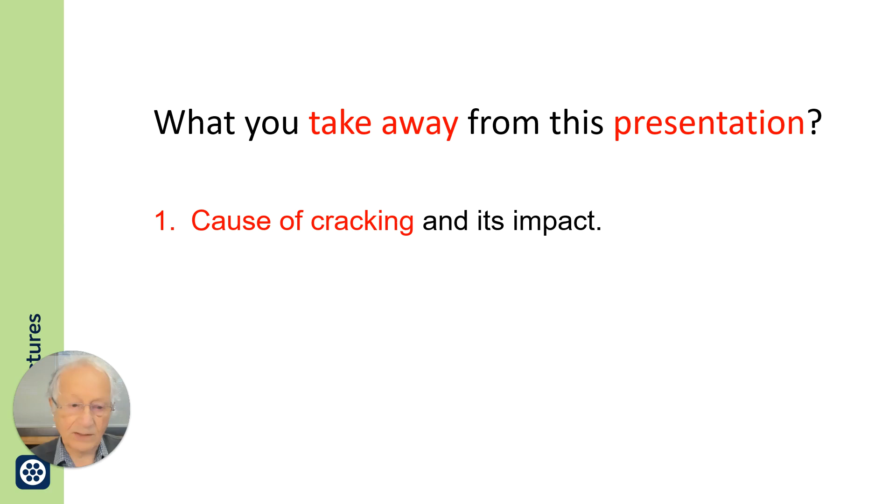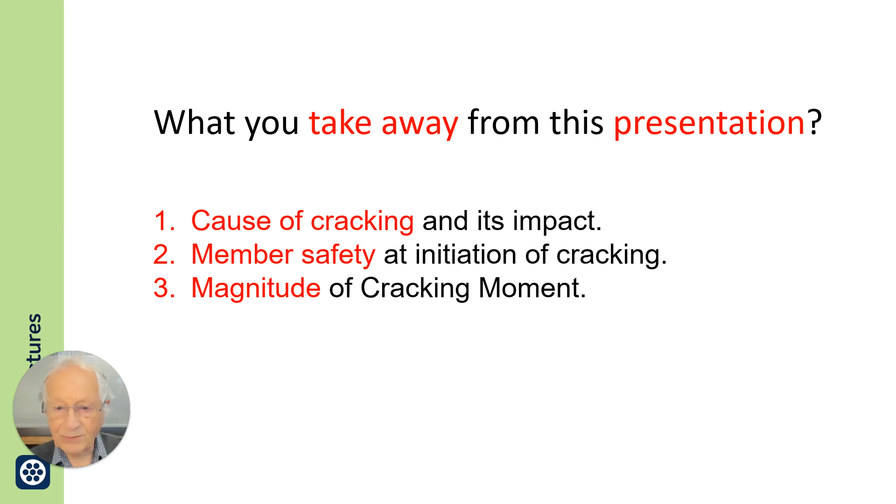Number one, what is the cause of cracking? Member safety at initiation of cracking, magnitude of the cracking moment, building code requirements for cracking moments, and a design example.

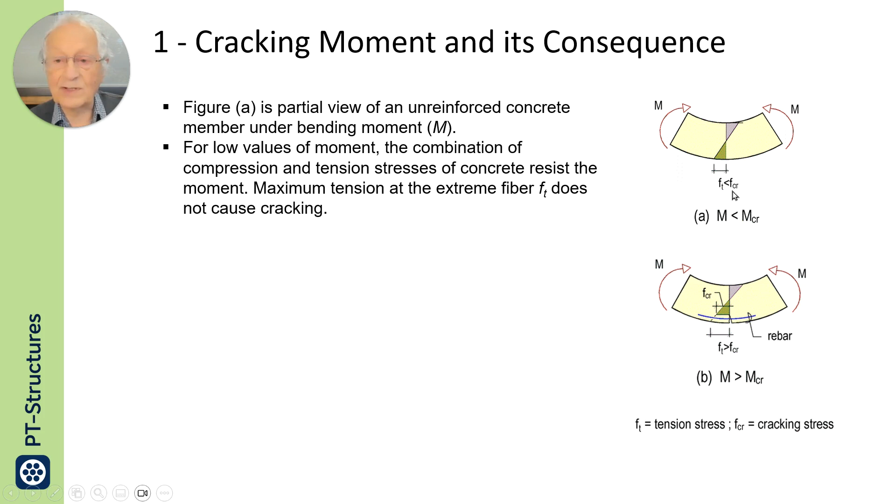For low values of moment, the combination of compression and tension stresses of concrete shown in the figure at the top lead to a tension stress which is less than cracking, and the member will not crack.

Now, increase in moment results in extreme fiber tensions that reach cracking stress, and cracking initiates. Once cracking initiates, the loss of tension which was provided by the uncracked section results in a drop in bending moment and reduction in the capacity.

Added reinforcement across the crack provides the lost moment capacity to resist the applied moment.

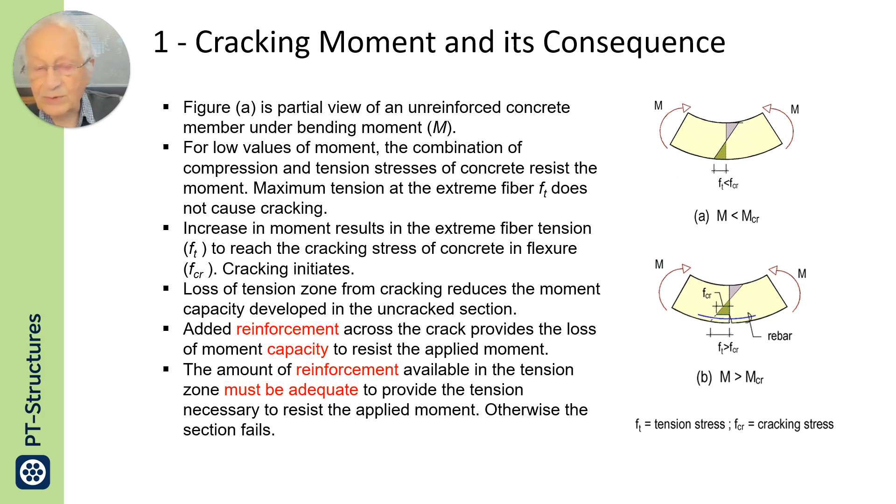So the bottom line is the amount of reinforcement available in the tension zone must be adequate to provide the tension necessary to resist collapse of the member. So in summary: what is causing cracking, what to do next, and also how the code is handling this.

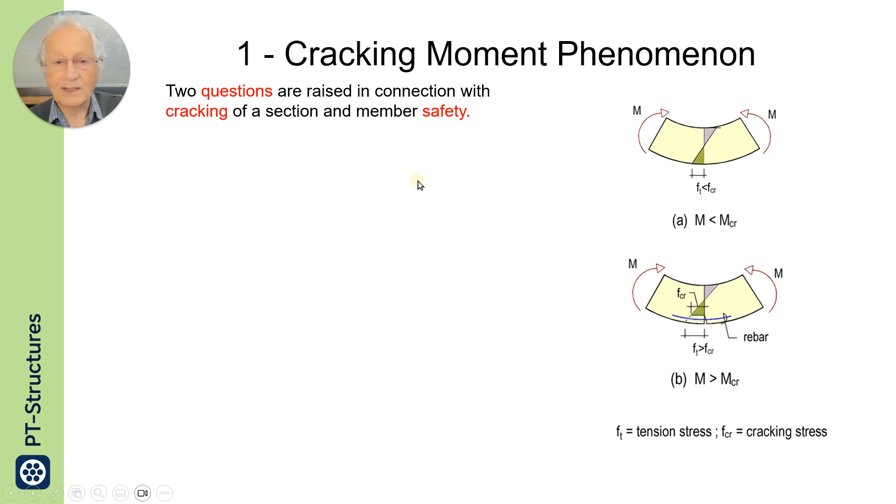The questions are: cracking of the section and safety of the member, at what value crack initiates and how much reinforcement you need, and also how the building codes handle this question. In addition, what is available in the literature in this respect.

This is the objective of this presentation. The primary objective is to clearly define the magnitude of the cracking moment and the required strength subsequent to cracking, and where this provision applies.

But first, let us review the following simple example to better appreciate the phenomenon. The focus is on cracking and safety.

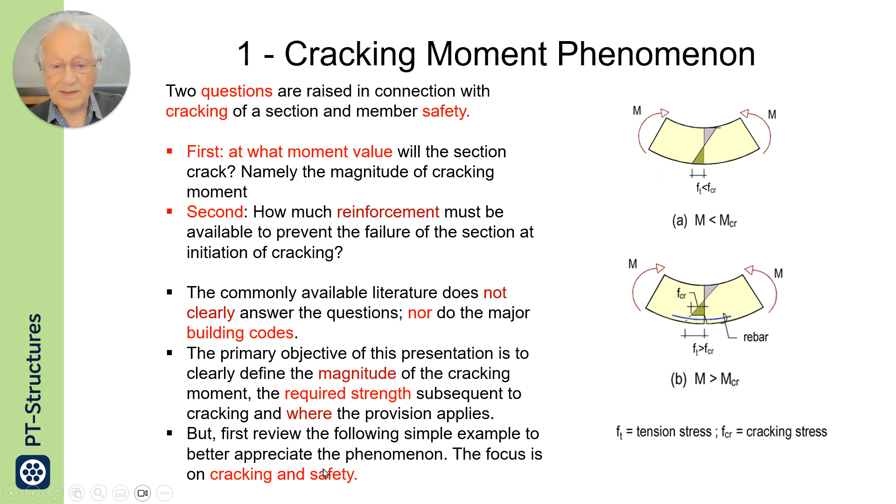I go through this simple example because I note controversy among engineers as well as in the literature, and the objective is to clarify or focus on where the controversy is and leave it to you to decide what you think is the right way to handle the situation.

Now, for safety of a member, the resistance capacity of each of its sections must exceed the force demand that causes cracking. That is obvious, but let us follow it up.

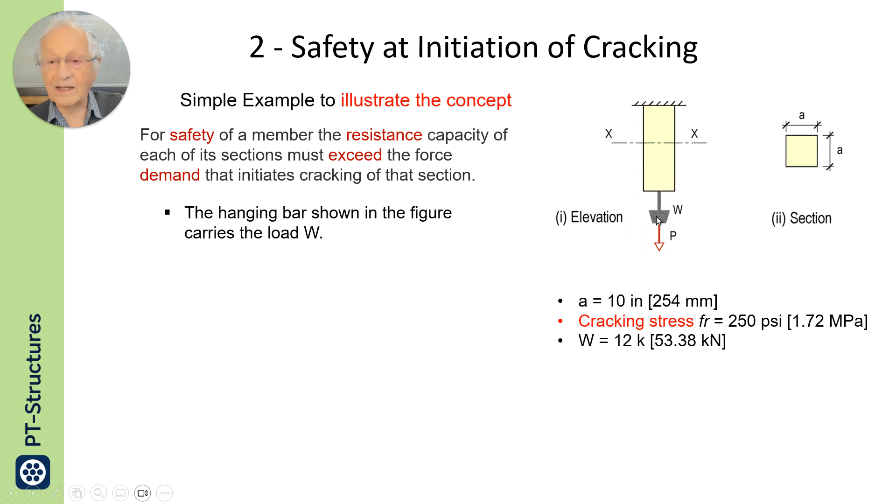In this hanging member, I have the properties, cross-sectional area. What causes cracking of this concrete? It has no reinforcement. And how much weight I have at the bottom, weight W.

The bar has no reinforcement. The two questions I raise:

At what value of P will this bar crack? This gives the cracking force.

Second question: once cracking initiates, how much reinforcement is required to be available in the section to avoid breaking of the member in two? This addresses the safety question.

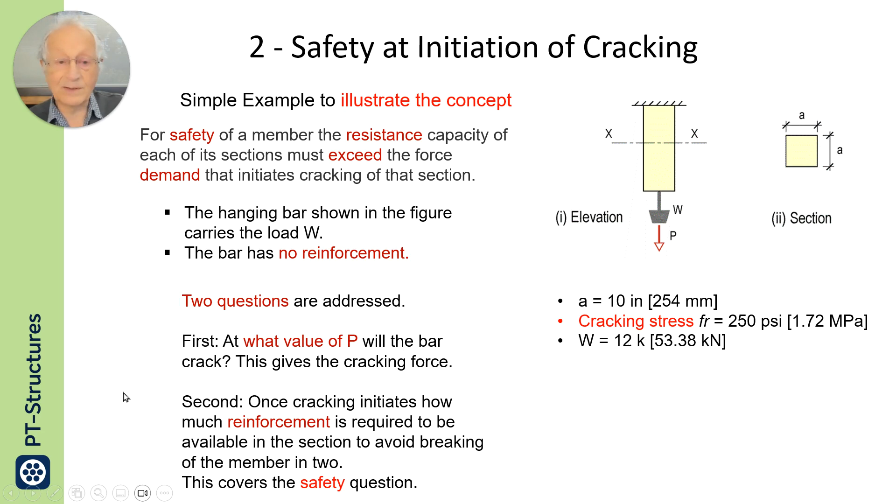Both of these questions appear to be obvious, yet we go through it because it is not treated as obviously as it appears in the literature and in the codes.

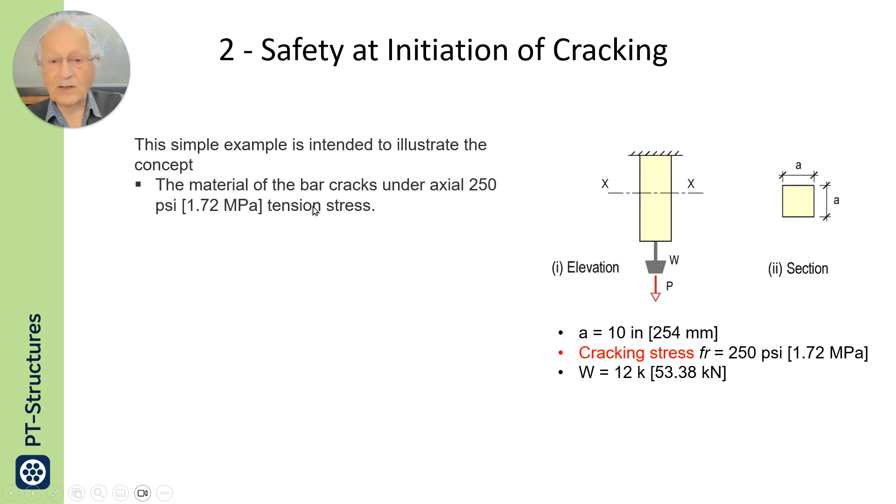Now, the material of the bar cracks at 250 psi. How much force is needed to initiate cracking? You take the cross-sectional area, 10 by 10, times the cracking stress, and that gives the force. You need 25 kips in total to initiate cracking.

Now, conclusion: the demand to cause cracking is a function of the member properties, not the magnitude of the applied force.

This is a very significant conclusion that appears very obvious. The magnitude of the force is not a function of P, not a function of the weight W. It is a function of the geometry of the cross-section and its properties.

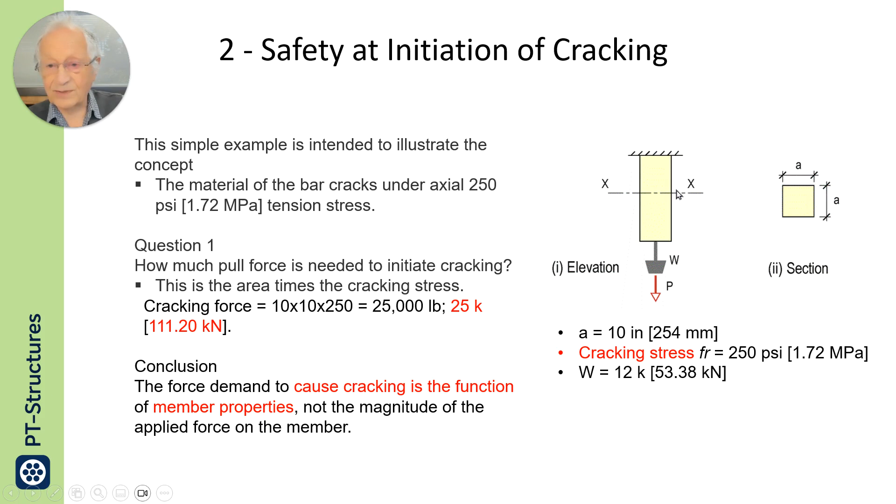Now, this is obvious, but let us move ahead and see what comes next.

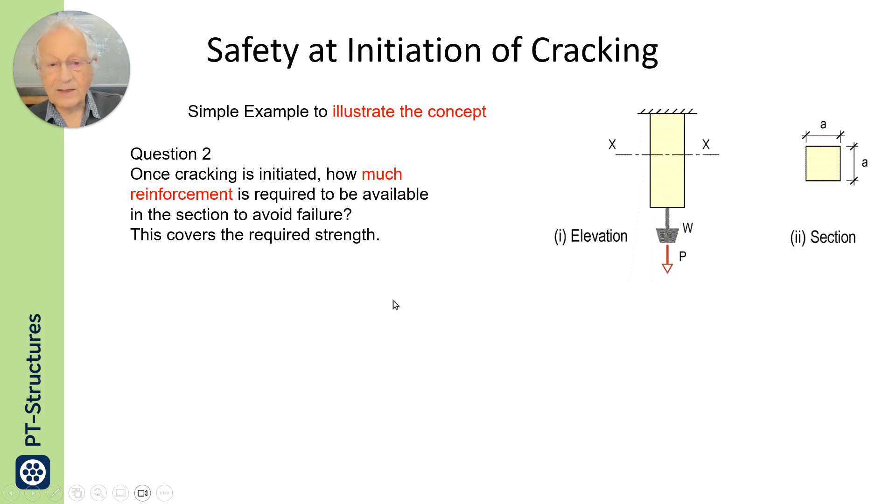Question number two: once cracking is initiated, how much reinforcement do we need to be available to avoid breaking? This covers the strength requirement.

You would say, I have the cross-sectional area, I know what the cracking strength is, I know how much demand is, this is the demand force, so the demand is 12K.

Therefore, the force W shall not be less than the strength; the strength shall not be less than the demand. Here we define a correlation between the required strength and the required demand. The required strength for safety in this example is less than the force that causes cracking.

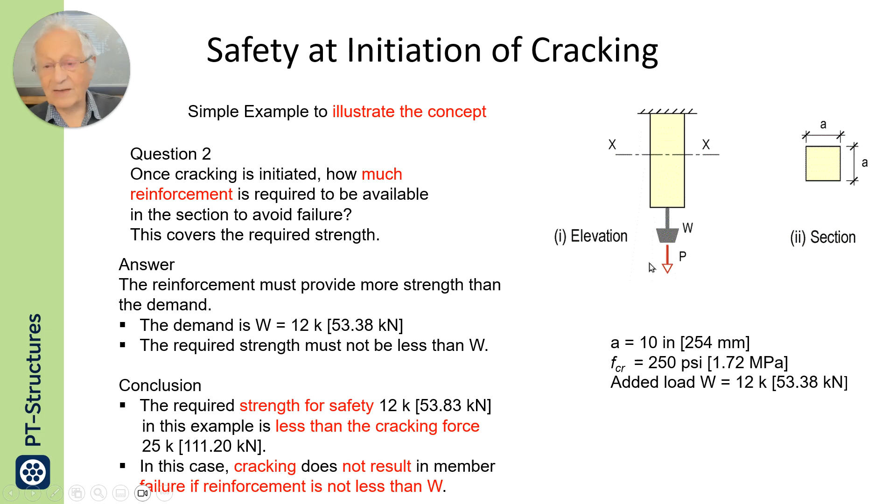Remember, in this case, the required capacity happens to be less than the cracking force. Cracking does not result in the member because we have less demand. That was a simple example.

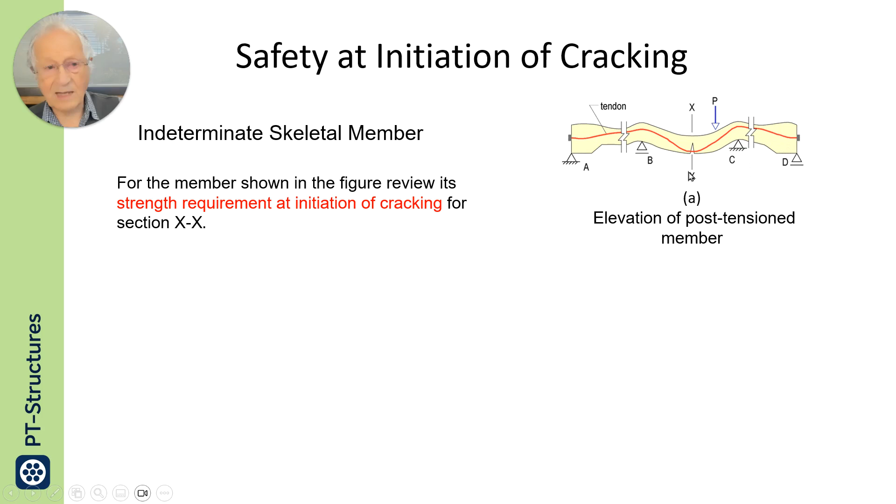Now let us look at this one, which is a member post-tensioned and continuous over a number of supports. We have a section here, XX, and we want to look at what is happening at this section. In the general case, the compression P acts at this section XX, shown outside, with post-tensioning through the section.

On the right, I show the demand: axial force, shear, and moment M. The axial force P is related to compression, but is not necessarily equal to F. Why? Because there will be reactions at the supports.

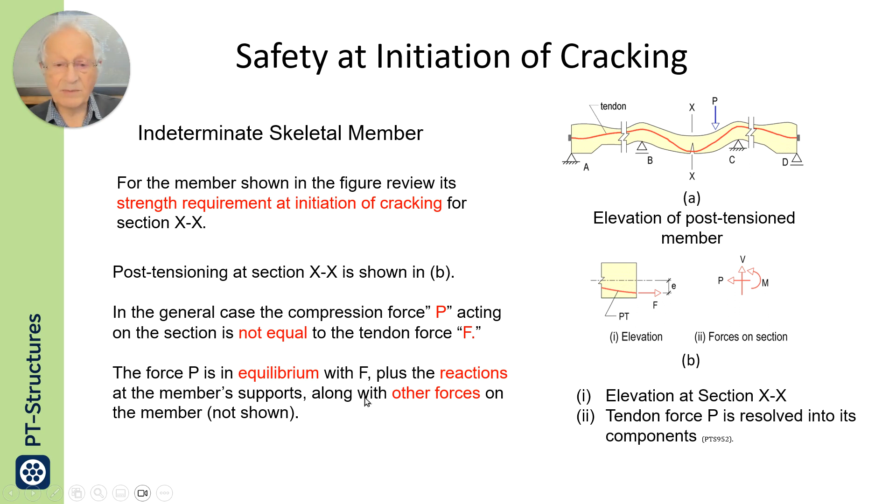In the general case, the compression P acting on the section is not equal to the tendon force F. Why? Because in the general case, you have supports, could be column, could be wall, and some of the force is taken by the walls and columns. The force P is in equilibrium with F plus reactions at the member's supports, along with other forces which could be on the member and may have a horizontal component.

Now here I have reproduced the section. P is acting here, F is the force from post-tensioning. The actions on the member in the general case are shear, axial, and moment. The axial and moment break down into these two.

This is the stress distribution, consisting of a precompression and a bending moment. The precompression, compression at center, is from the average force of post-tensioning. The geometry of the section and the resultant of the actions on this section are shown here.

The compression force P and the moment M are the two items that control the initiation of cracking, compression and moment. The distribution of direct stresses on the section are shown here and broken down into their parts.

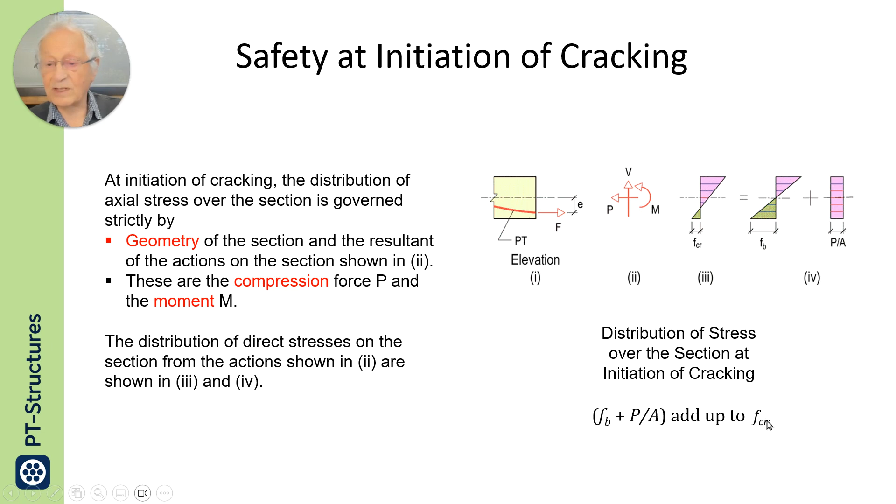So here I have a stress due to bending moment, and average precompression gives me the stress at the extreme fiber, which can cause cracking. Here is the repetition of the same.

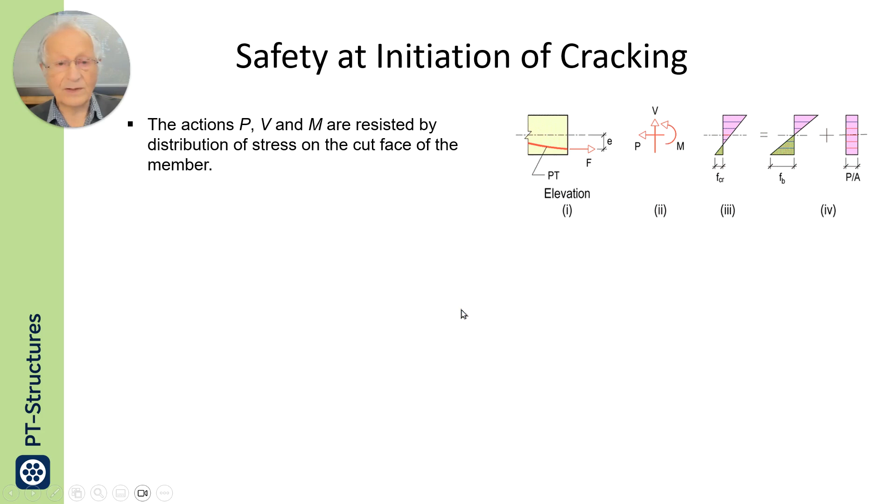The actions P, V, and M are resisted by the distribution of stresses on the cut section. These three actions are resisted by this distribution.

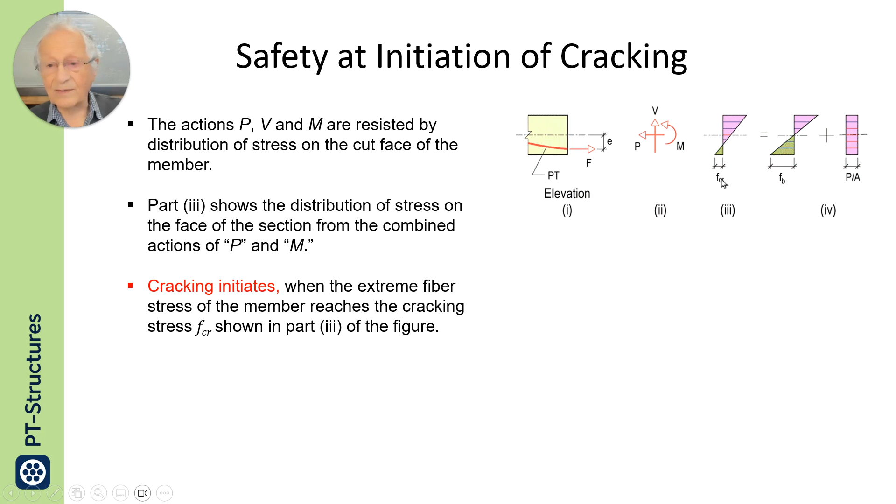Part 3 shows the distribution of stress on the face of the section from the combined actions of P and M. Cracking initiates when the extreme fiber stress of the member reaches the cracking stress FCR shown in this figure.

Note that the stress at the centroid of the section remains P over A. This remains P over A.

The distribution of stress on the section can be broken into its originating parts, which are axial force and moment, shown here. Axial force and moment result in this distribution, which will in turn lead to the cracking stress.

The extreme fiber stresses shown in part 4 add up to the cracking stress value shown in part 3. The sum of this and this add up to the cracking stress. The moment causing this condition is the moment that initiates cracking on the section, MCR, M cracking.

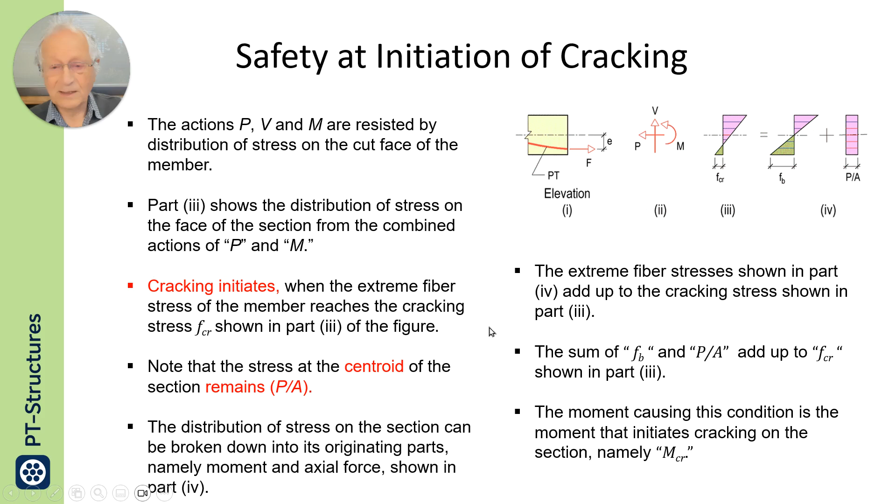Now at this stage, you may wonder why am I repeating myself, dwelling on this simple diagram? The reason is obvious. For me, it's obvious because when you go to the literature, you see a different image and get a different answer. That is the reason I'm repeating, to make sure that we are clear.

Now the cracking moment that initiates the extreme fiber tensile stress is given by the stress from moment plus the stress from axial. So this is the cracking moment.

ACI 318 recommends the following for cracking stress. ACI says the cracking initiates when the stress reaches this magnitude in bending. Now, independent of that, this relationship which I have at the bottom right can be simplified to the relationship here on the bottom left, which says cracking moment is given by this value. This is the magnitude of cracking moment.

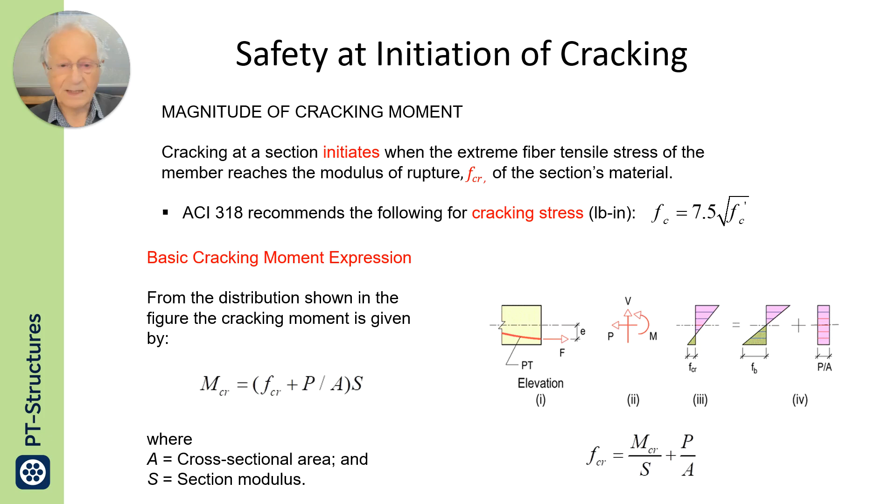A is the cross-sectional area, and S is the section modulus. I'm going to call this basic cracking moment expression to differentiate it with the alternative cracking moment. This is the basic, derived from this diagram. The alternative formula doesn't follow this diagram. Now, from the distribution shown, we get to this basic value. If you look in some of the literature, this is what you find.

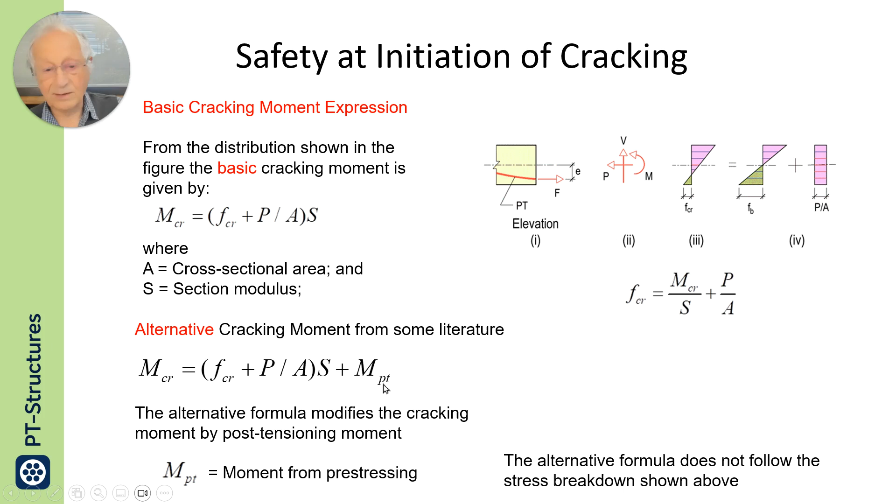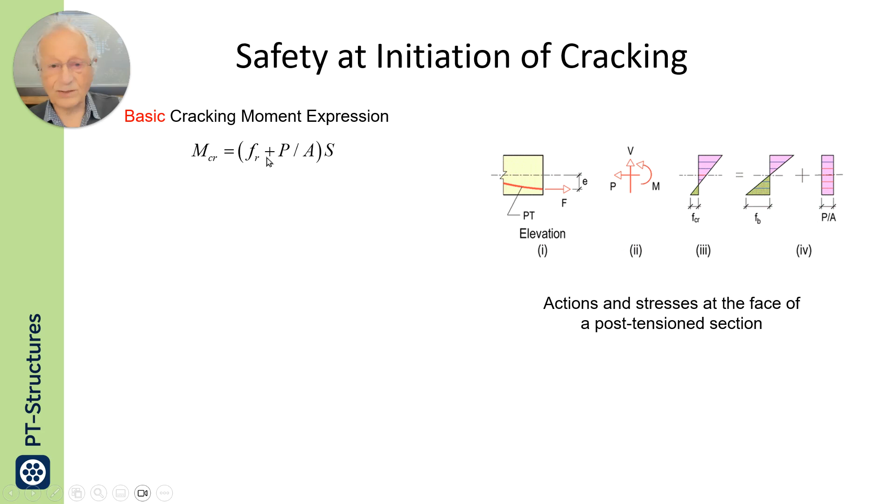That in addition to what we have at the top here, it says the cracking moment includes the contribution of MPT. MPT is the moment from post-tensioning. Why and how, I am not sure what is the argument, but certainly doesn't look right to me. I think the one above makes sense, the basic makes sense. This is the basic relationship derived from this distribution. This is the alternative that you can find in the literature.

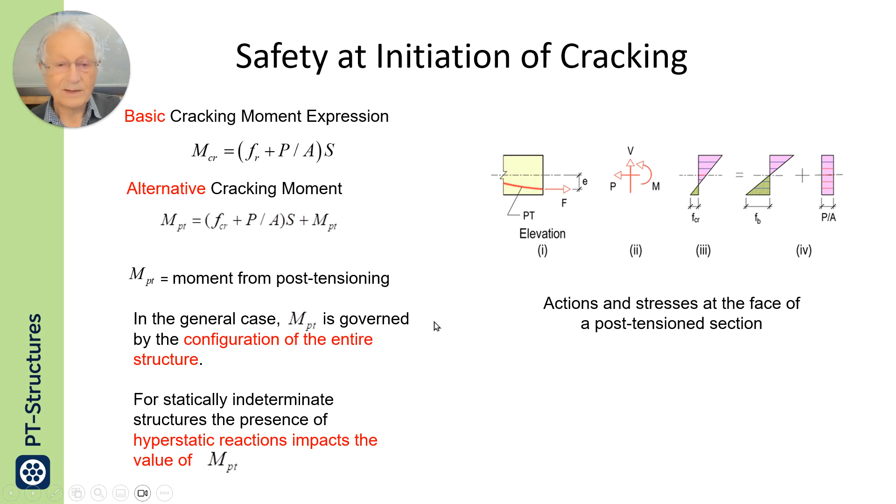For statically indeterminate structures, the presence of hyperstatic reactions impacts MPT. Now, this expression that I have here expands on this. It says MPT, if at all were to be a consideration, must include the hyperstatic reactions, which again, if you look in the literature, it doesn't include. MPT that is given here is simply the force F times E. So, as far as we are concerned, this is the right formula at the very top.

What about building codes? Building codes have this provision to avoid failure of a section at initiation of cracking. The reinforcement in the section must develop moment capacity not less than the cracking moment that initiates the crack. That looks very reasonable. The cracking moment requirement requires a safety factor, K. In other words, a section which has a capacity, as far as ACI is concerned, 1.2 times the cracking moment is considered safe.

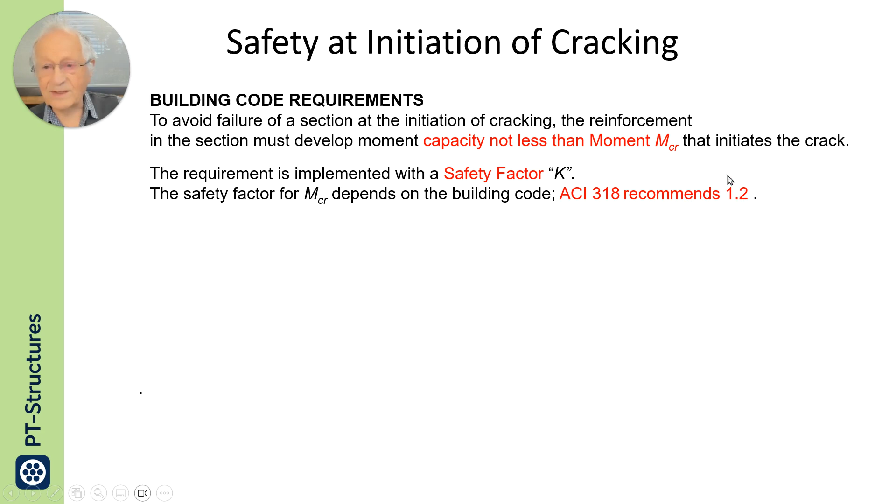Now, ACI permits you to waive this requirement. I have it somewhere down in the following slides, but the penalty is very high. Now, this is the relationship for ACI. The capacity should be 1.2 times the cracking moment, or the other provision, which I'm going to come up with in the following slides. Phi is the strength reduction factor.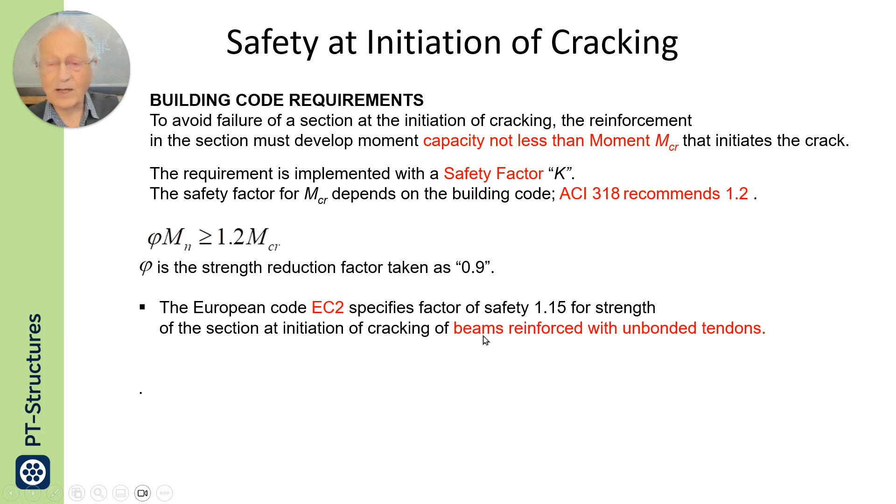EC2, the European code, has a safety factor of 1.15. The section at initiation of cracking of beams reinforced with unbonded tendons. That's very interesting. That European code states that this requirement applies to beams that are reinforced with unbonded tendons. But EC2 permits the requirement to be waived if the strength of the cracked section is not less than the force demand. That's very interesting. Very interesting. Why?

Let me repeat it. EC2 says if subsequent to cracking, the strength of the section is not less than the demand, you can waive this requirement. My response to this is, at design time for safety, a requirement is that all along the member you have safe design. You have capacity in excess of demand. In other words, before you get to the question of checking cracking, you have already satisfied the requirement of safety along the entire member. So this is really redundant. Nonetheless, it is in the code.

ACI 318, in its latest, requires the evaluation for slabs with bonded tendons. EC2 has the opposite, with unbonded, for both one-way and two-way systems, but also requires the application to beams reinforced with bonded tendons. ACI wants to penalize the application of bonded tendons. Now this is interesting. The latest ACI 318 permits this requirement to be waived, provided subsequent to cracking, the section's capacity is not less than twice the force demand. Now, that is very vague. That is in later ACIs.

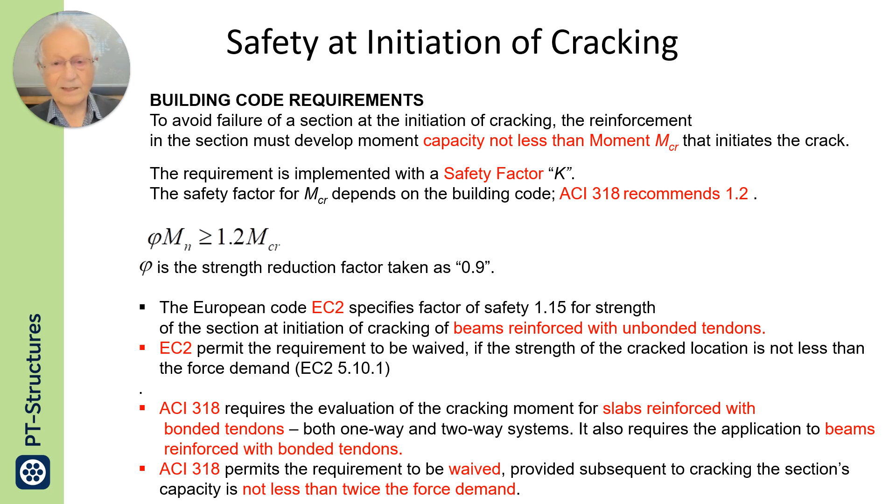You can forget about this factor of safety if at the location of crack, the capacity is twice of demand. Now, what is the demand? Is it 1.2 dead, 1.6 live, 1 hyperstatic load combination? Is that the demand? It is not very clear. Or is it dead, live, and hyperstatic? Now, that is left to the judgment of the engineer. Now, slab constructed with unbonded tendons, neither ACI nor EC2 require check for initiation of cracking.

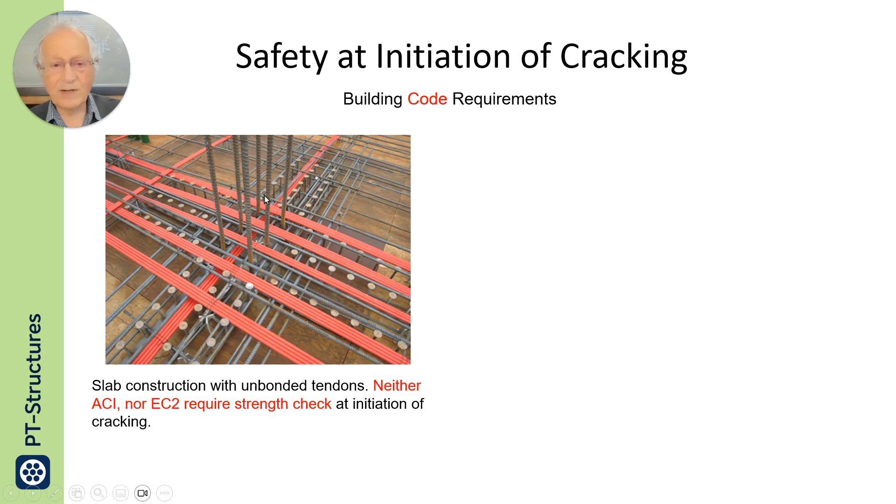In one of the following pages, I will explain why. Just pay attention here that neither of the two for this configuration require checking for cracking. Now for bonded, ACI requires checking for safety at initiation of cracking.

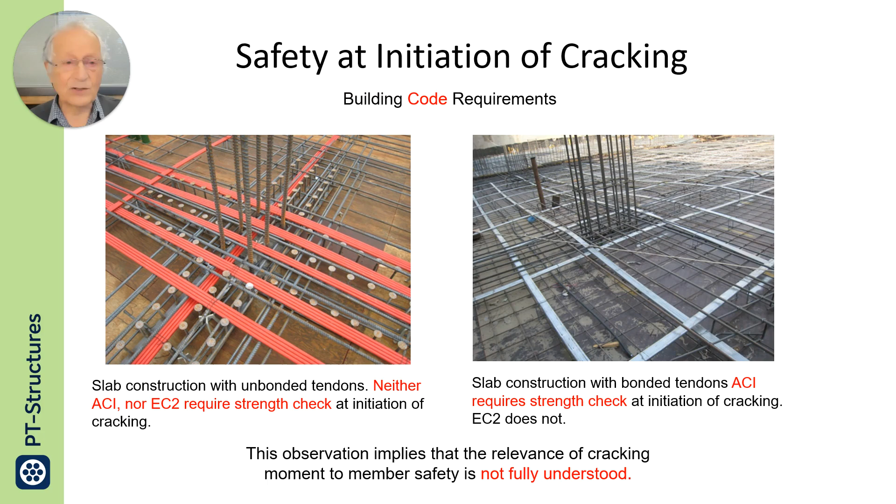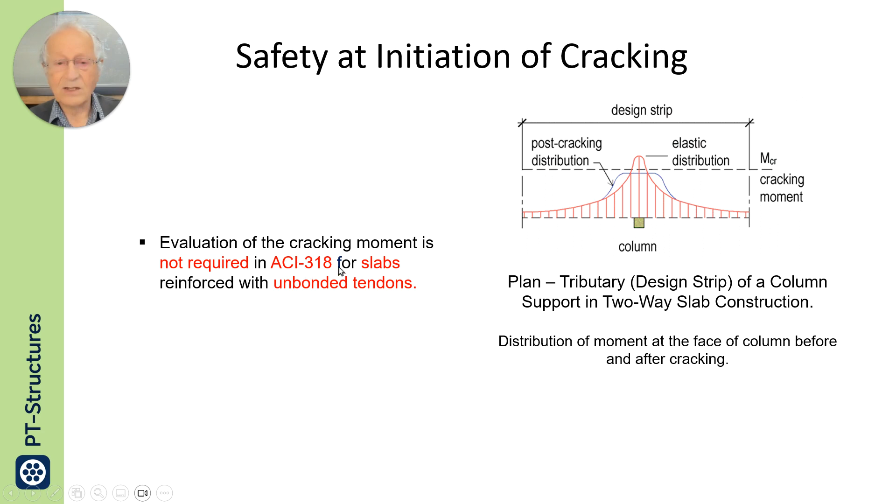So it appears that for column-supported slabs, the initiation of cracking near the column, where the maximum stress is, is not going to be very critical. So evaluation of the cracking moment is not required in ACI for slabs reinforced with unbonded tendons.

The loss, okay, this is what I explained. Local increase in strain at the crack location will be distributed over a length of slab crossing the crack. This does not apply to beams or one-way slabs where the stress is all uniform at the top. You do not have the reserve that you have here.

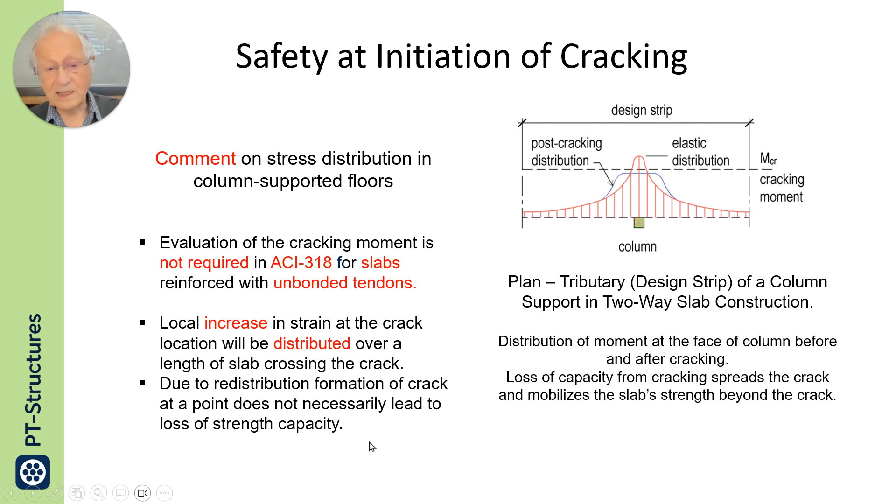Due to redistribution, formation of crack at a point does not necessarily lead to loss of strength capacity. Now let us go over a design example to see how it all applies.

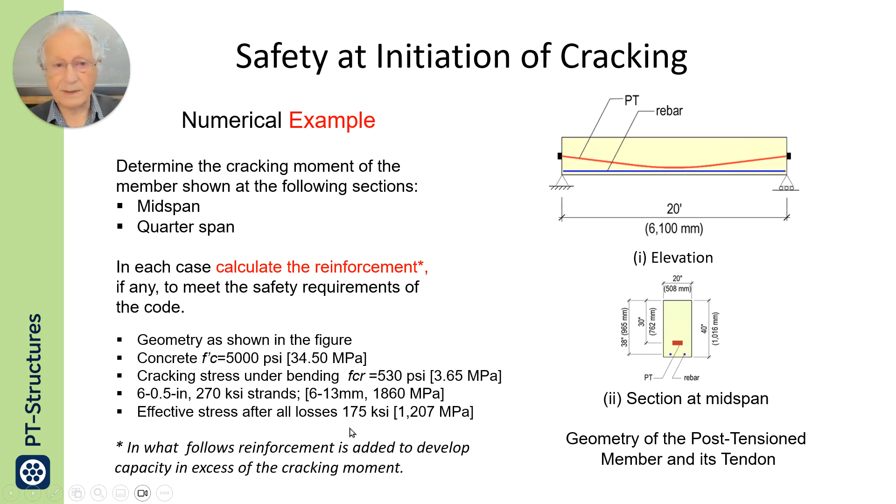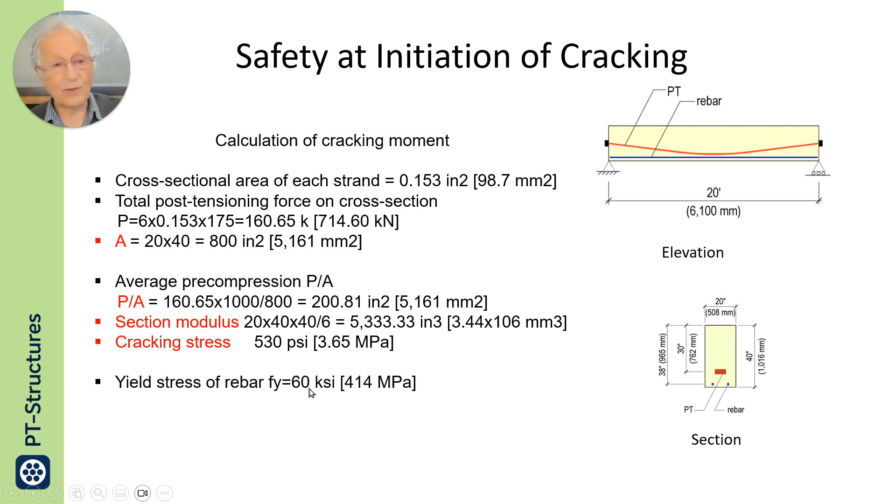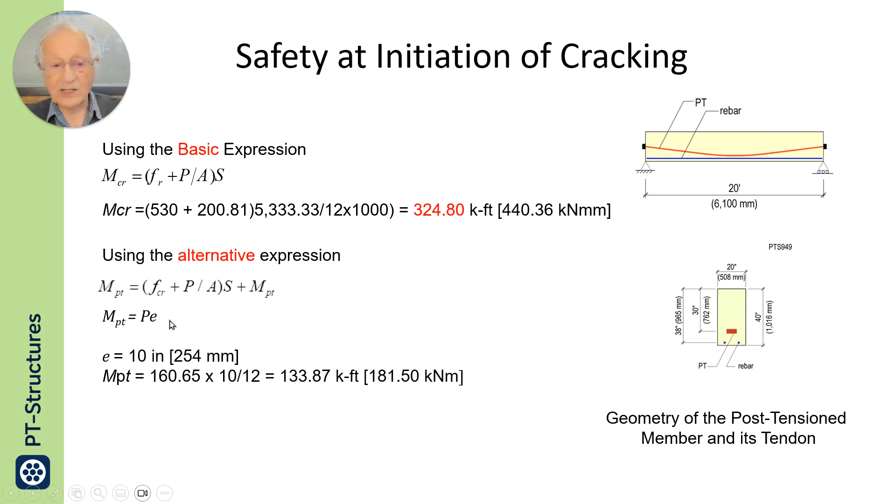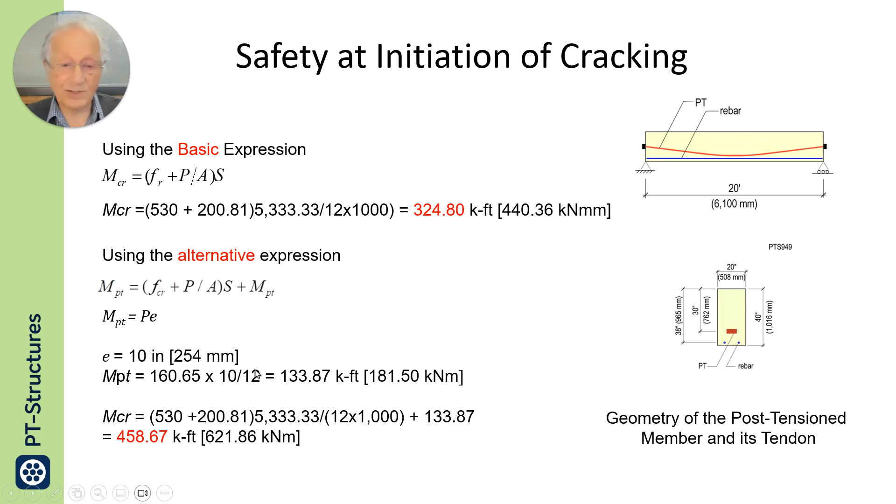So there is a significant change between the two. When it comes to code compliance, we check it now at the quarter span. That was the other requirement.

At quarter span, or everywhere, the moment capacity of the section is calculated. The moment capacity is then compared with the demand arrived from the cracking moment. Reinforcement is added where capacity falls short of demand.

This is the procedure. At midspan, this is the moment capacity; I've used this formula. From the basic expression, this is the moment capacity, a conservative, easy way to find the moment capacity of a post-tensioned member.

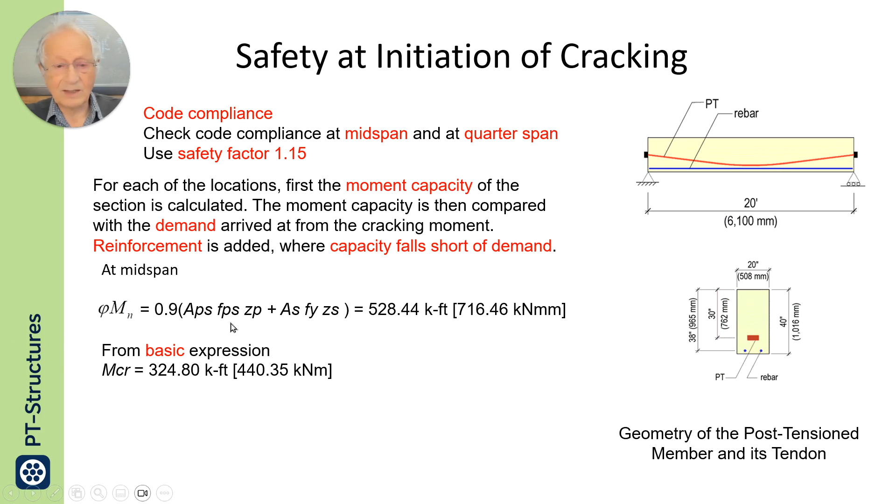I have in another presentation a greater description of how to simply arrive at this simplified expression. From the alternative expression, this is the cracking moment, and the moment capacity calculated here at bottom left in each instance exceeds the demand, so we are in good shape. We don't have to do anything at midspan for this example, irrespective of what we use.

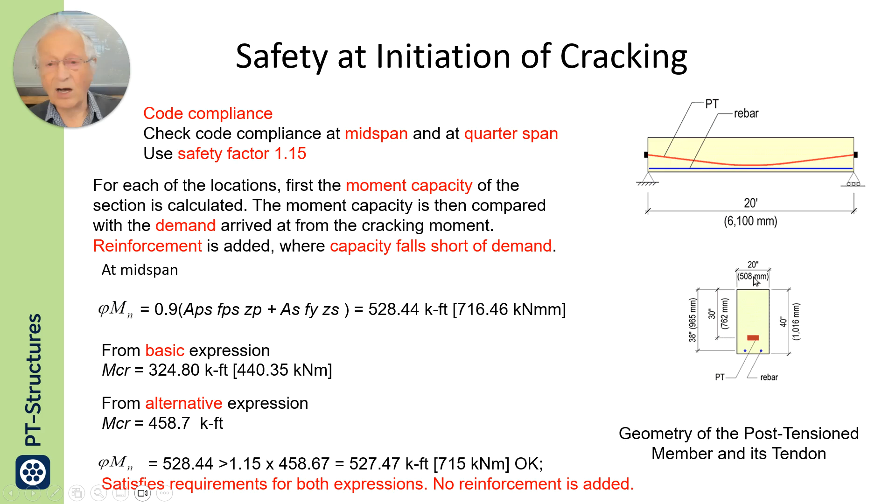Now we go to quarter span. At quarter span, MPT will be the post-tensioning times its eccentricity, so the moment capacity is calculated, and this is the amount. I have calculated the eccentricity at the quarter point, assuming a simple parabola.

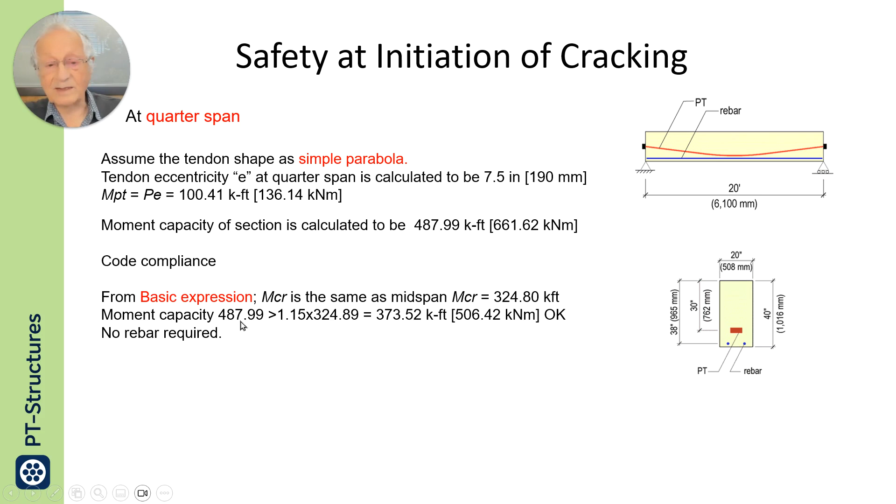From the basic expression, the value is this. The cracking moment is the same. No rebar is required because the moment capacity is more than the demand.

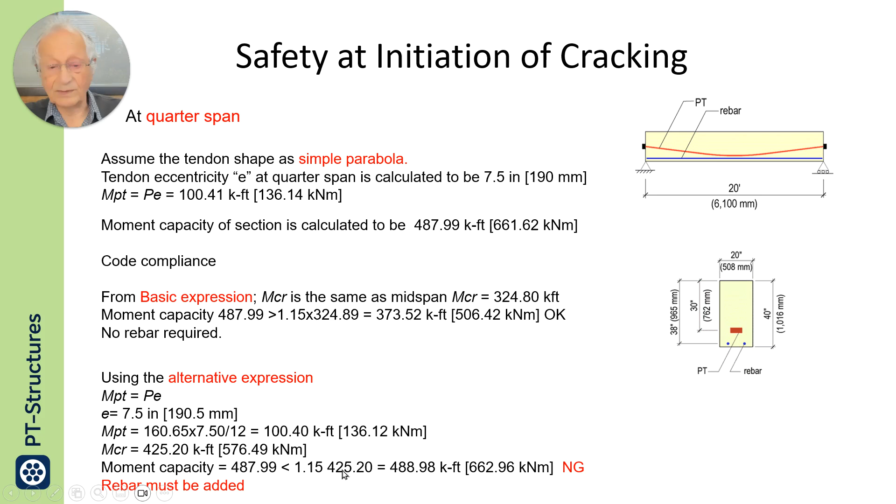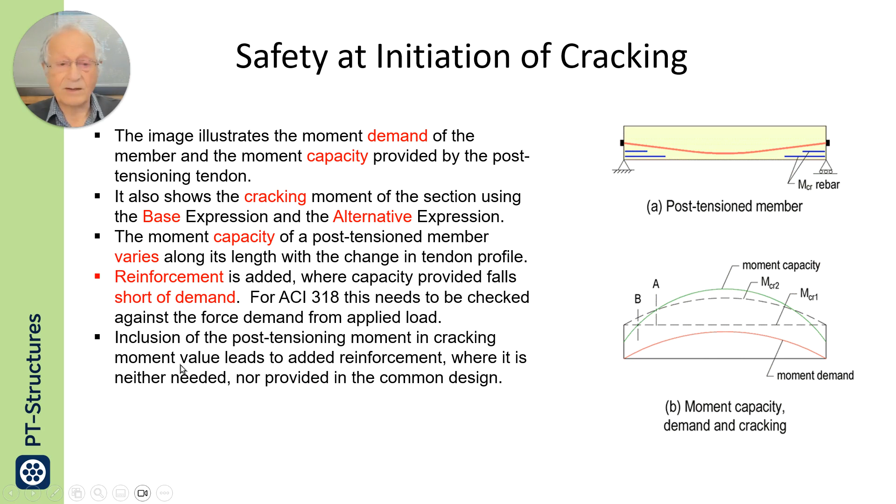The moment capacity of a post-tensioned member varies along its length because of the change of tendon profile. Reinforcement is added where capacity falls short of demand. Now, inclusion of post-tensioning moment in cracking moment values leads to added reinforcement where it is neither needed nor provided in the common design. In the common design, engineers don't put this.

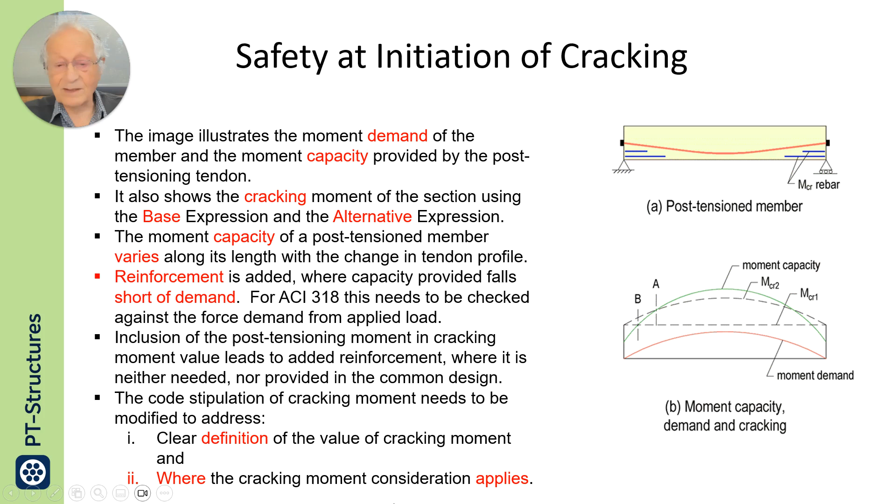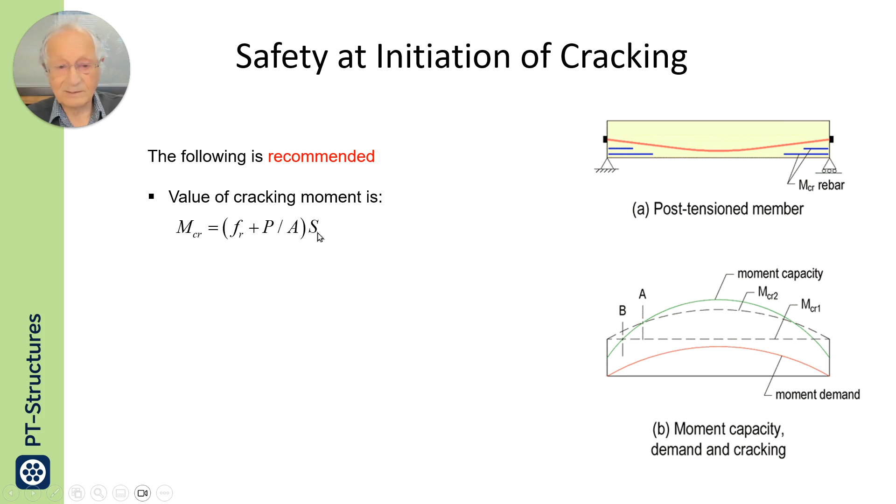The code stipulation of cracking moment needs to be modified to address clear definition of the value of cracking moment and where the cracking moment consideration applies. These two are really not fully clear. So the recommendation, as far as I'm concerned, is the following. Value of cracking moment is this. Use this as far as I'm concerned.

The cracking moment check should be limited to a section that is not reinforced to meet the strength requirements of design from application of load. Where is that section? I don't know, because by the time you do serviceability check, and then you do safety check, and this is part of your safety check. And the first step in safety check is that you calculate demand and you make sure that everywhere the demand is met by adequate capacity.

So this location doesn't exist anyway. In reinforced concrete design, the reinforcement for strength is based on ductile response of concrete and post-cracking. I want to say here that even if you have a demand which exceeds the capacity, in reinforced concrete, you use redistribution. You have the option of redistribution. This is just extra, I would say, safety.

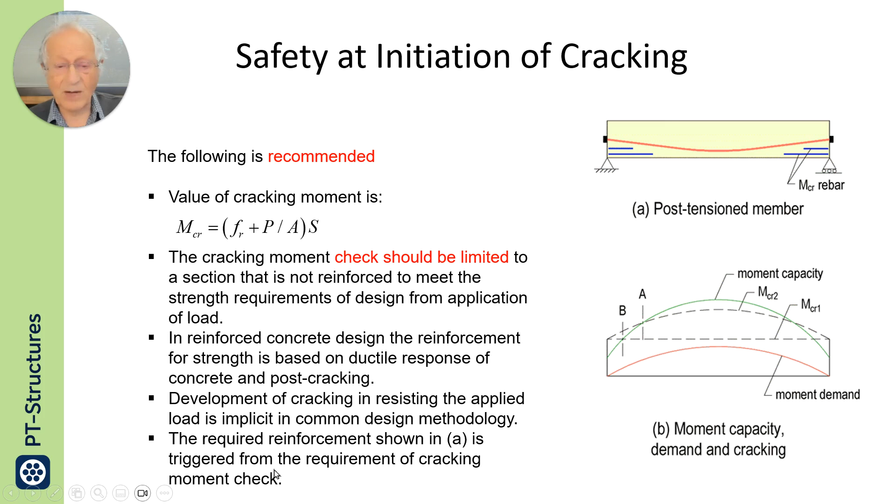Development of cracking in resisting the applied load is implicit in common design methodology. What I'm saying here is that the way you do your design, it is based on post-cracking, not pre-cracking. So the question of initiation of cracking shouldn't come up. Why? Because the entire design that we do is based on post-cracking behavior of concrete, ductility of concrete. So the required reinforcement shown in A is triggered by the requirement of cracking moment.

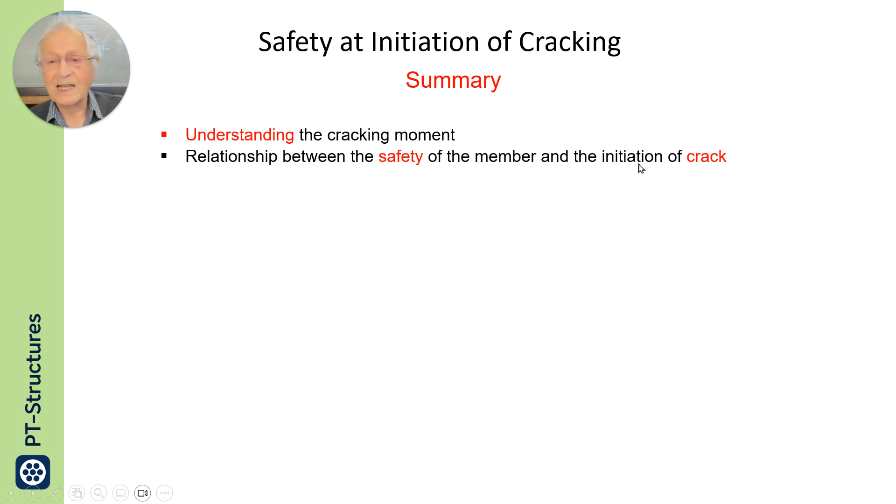Anyway, summary. I started by trying to bring an understanding of the cracking moment, relationship between safety of the member and initiation of crack, magnitude of cracking moment. Cracking moment is a function of geometry, I emphasize, and axial force and the cracking stress.

Basic cracking moment expression is something which I emphasized, and I also gave here the alternative cracking moment expression, which is in some of the literature. Neither ACI nor EC2 give you the expression. So it is left to you to decide what is the valid expression.

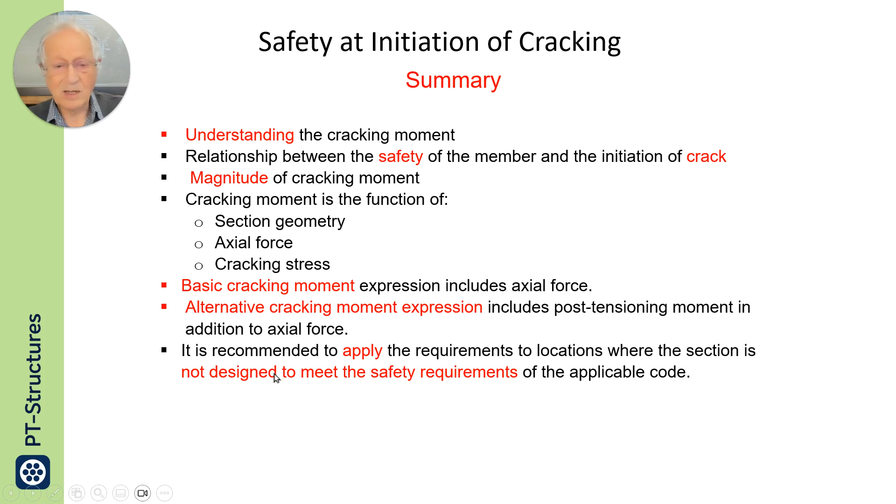It is recommended to apply the requirements to locations where the section is not designed to meet the safety requirements of the applicable code. There is no such location because the codes require that the entire length of the member should be safe, not selective locations, but nonetheless, this is in the code anyway.

That brings me to the end of the presentation. The material that I presented to you was extracted from this book, and I thank you for your attention.